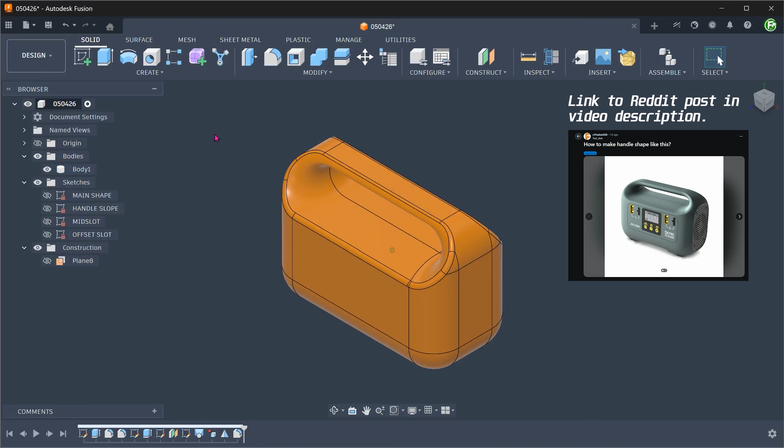Let's take a look at how we can model this handle. So my first impression was that we can probably model out a simple cuboid for the main body and then make a loft for the handle. But it would really be challenging to achieve a seamless curved exterior shape.

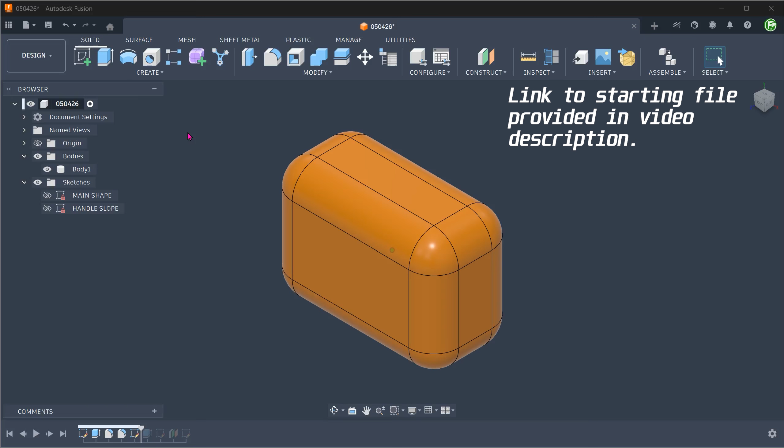I then started to ask myself, is there an overall shape here? Turns out that there is. The starting shape is simply a cuboid with some large fillets. I have prepared a sketch here to trim out the starting shape of the handle. Use this sketch to perform an extruded cut.

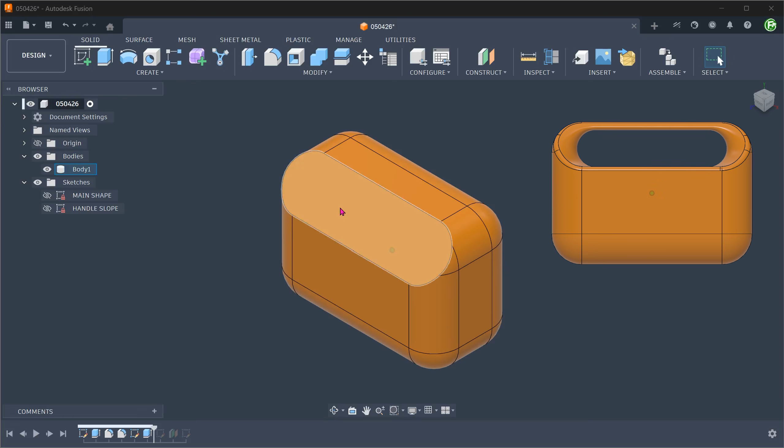If you look from the side, the handle has a slot cut in the middle. We can perform a lofted cut from this face to a slot sketch in the middle. I have prepared a slot sketch on the front plane. In order to make this face flat, the bottom edge of the slot coincides with this edge.

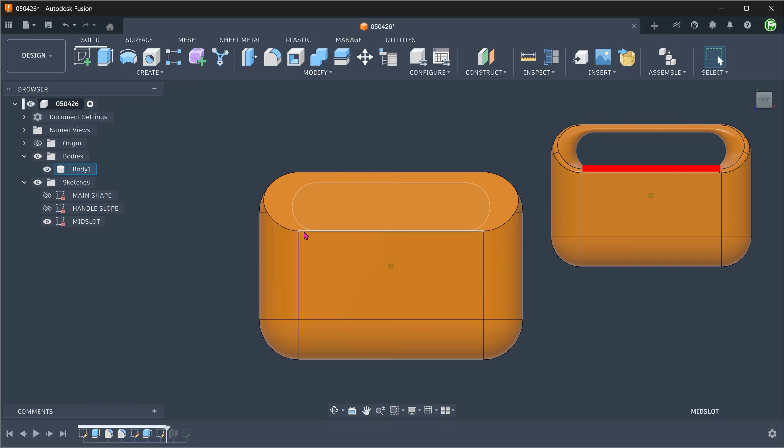Additionally, I have also projected the same slot sketch on a plane that is slightly offset from the front plane. This extra sketch makes it easier to control the flow of the loft.

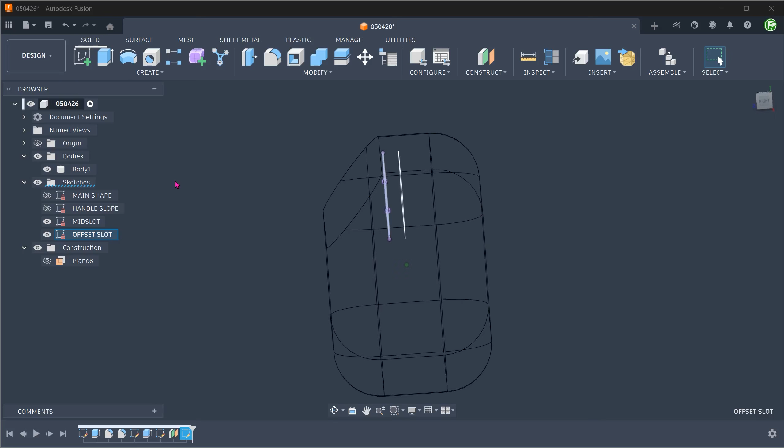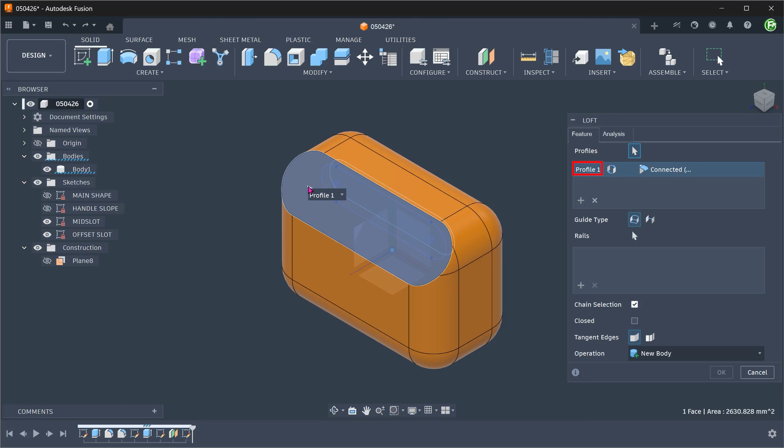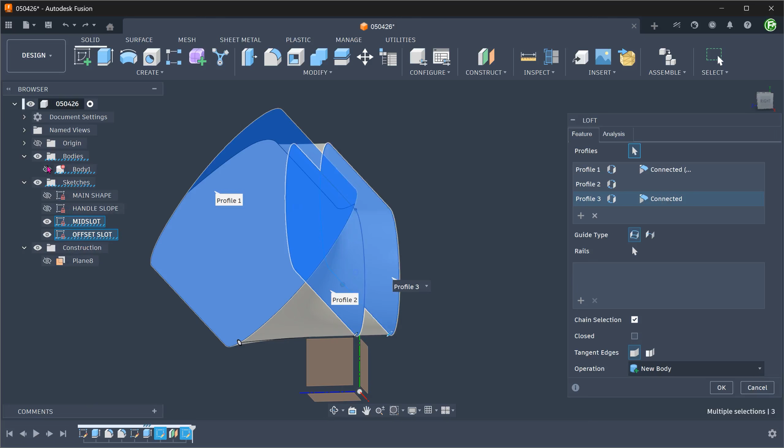Go to Create, Loft. Select this face as a first profile. Let's hide the solid body. Select this sketch as a second profile. Finally, select this sketch as a third profile. Let's bring back the solid body.

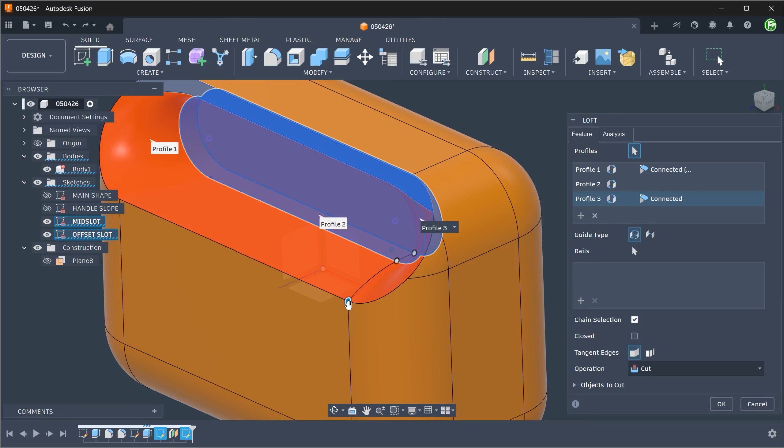Upon doing that, Fusion recognizes that we are doing a cut. You can see that there are some weird faces being created. You can try adjusting the connectors, but in this case I was not able to get rid of the faces. Do let me know if there's a better way to do this. A way to get rid of the face is to simply select and delete.

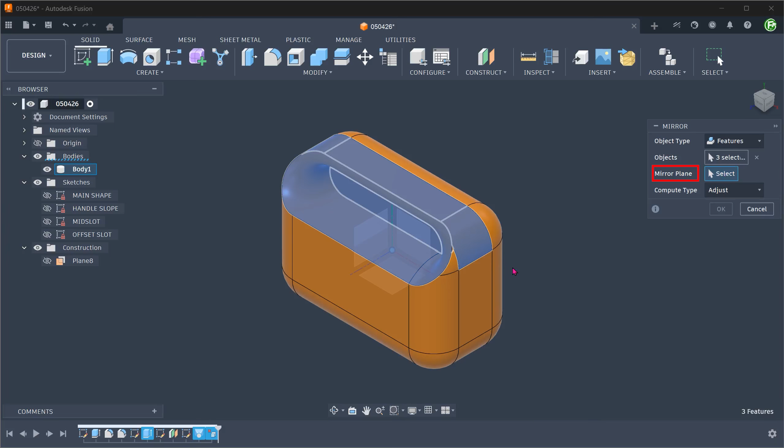Go to Create, Mirror. Set object type to Features. Select the extruded cut, the lofted cut, and the delete face. For mirror plane, click on the select box and select the front plane. In this case, I had to use the Adjust Compute type for it to mirror properly. Lastly, we can add in fillets.